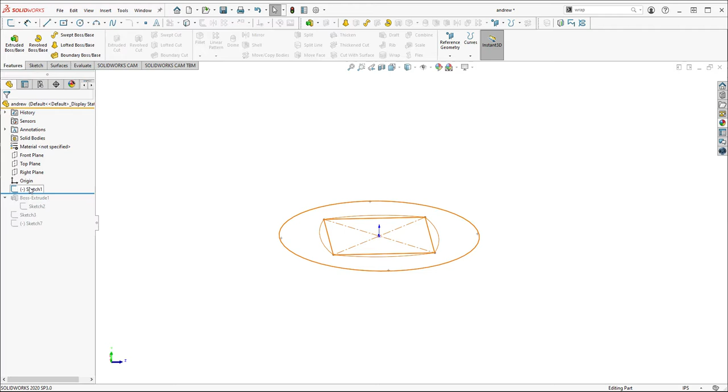I think one of the things to consider in SOLIDWORKS is the orientation. Here I think it makes sense to build it with the round face on the top plane and orient it into this standing position at the end for the rendering. It'll just help keep the planes in line. I also recommend having your image open and off to the side.

None of the dimensions that I have are accurate, I'm just judging by eye. Obviously, for you, I hope that you can either judge by eye or try and find orthographics of the image to help you with the traces.

So here's that quarter sketch that I made. Just a comment on the master: these are all mirrored about these lines. So this mirrors about this to give us this one, and so on and so forth. This means that as we adjust one of them, they all adjust equally.

So I copied over two of them, made a sketch fillet through what corner and extruded that up. And then this is a copy of the circle. And actually I'm realizing now it really should be more of, it should just be a quarter.

Again, thinking back to that knob sketch demo, or that knob demo from Project 2, now here's the profile that I want to loft. Something that I'll do sometimes if I want to copy this to be a quarter is actually I'll put in a revolve feature about here, and I'll just revolve it 90 degrees.

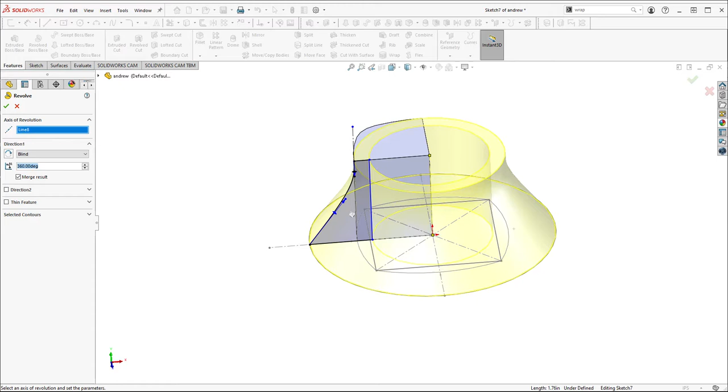I can click this to flip it the other way. I don't want it to merge with anything, but now we have two equal identical faces. If I need to adjust it down the road, it's just one sketch to edit, not two different ones. So this is slightly different from that demo.

And actually I'm realizing this maybe negates the need for this sketch. But what I would do is I would loft, I think this should work, this face to this face. For guide curves I'm going to select this.

And then again a reminder, if you need to select disjointed edges, you want to right click first and say Selection Manager. All of these should be in a row. Make sure you're not accidentally clicking on a different edge when you start it.

And now let's see if this works. Can I say not tangency to face, normal to profile is what we want. And that's again so that when we mirror it we don't have any seams. Seam looks like it's working to me so far.

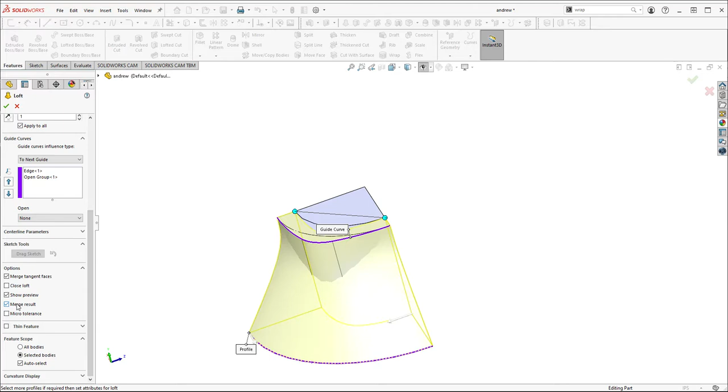We want to make sure that we don't merge anything here. And this was totally unintentional, but I'm realizing now that actually this hollow makes sense. If we look at the image again, that hollow is needed in there.

And then finally we would just mirror the bodies, merge the solids, and mirror this again. And now we should have something similar, of course, missing the details.

The kind of wafer on this back side can be approached in multiple ways, but again, because we built it this way, from this plane, it's probably the simplest thing to do.

And so I'm just glancing over at the image. I would maybe take a spline and then just pull on sort of these arc controls. This is maybe where it's helpful.

The only hard thing with building it at a weird orientation, or an orientation different than the render, is figuring out where your ground plane is. So it might be helpful at this point to have this in here.

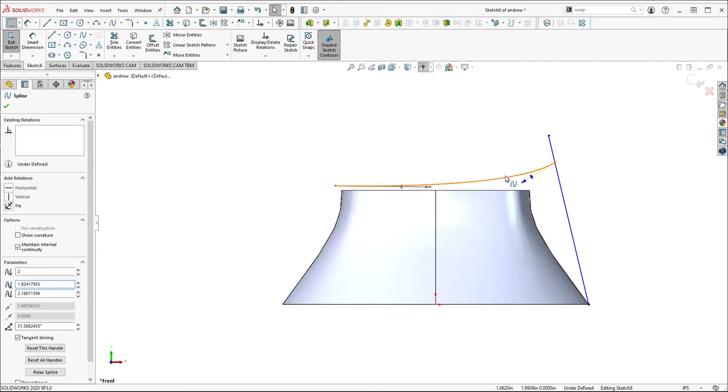If this, I'm having second thoughts on the spline, maybe it's just a straight line that can be parallel with a bit of a bend at the bottom, tangent to this. This can represent the ground plane.

And then what I would do is just with a single line we can load an extrude command. You'll notice down here there's an automatic checkbox for a thin feature. Yeah, maybe this should be done before you mirror this other half. But the direction can be blind, and we can not merge it.

And then creating a sketch on, in this orientation, the top plane. You know, these edges can be copied. So I can select those edges, convert entities.

And let's see, maybe the main difference is this one, it needs to come lower. So maybe I would, let's see, I'd probably put a trim in here maybe.

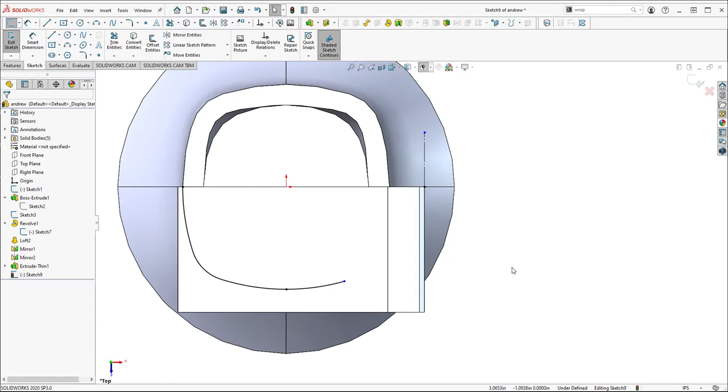And this is perhaps where it would make sense to have, set this for construction. It might make sense to have a spline in here to complete this shape. So we can tell this to be tangent, and we can tell this to be tangent.

Now I'm realizing that this thin command, here, let's finish this and see what it looks like.

Oops, we got to go through both if you're cutting with just a single line. The weird thing with this is it's going to leave this edge. So one way around that, instead of this being an extrude thin, I'm going to delete this—unfortunately it gets rid of our sketch—and instead do this as a surface.

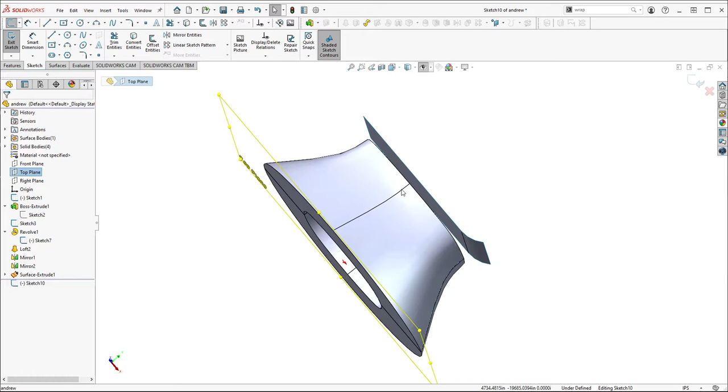So we can extrude this surface the same way we did the thing before. Top plane, same exact process, copying this edge over.

Maybe we only want the top one, and maybe here again is where I would have a line coming off this bottom edge, complete this with a spline, tangent, and tangent.

There we go. And now we're going to do a surface trim. These are all new tools. I loaded that while still in the sketch, so it's using the sketch as a trim. Here you can see I can select parts of the surface to cut away—remove selections. Sometimes it might default to keep selections, so just make sure you know what setting you have, and check that box.

Now if we take this surface and use a command called thicken, this edge running along the side will be consistent—we won't have a weird cut in it. Again, this is all just judging by eye. You can flip the direction it goes. We don't want to merge the result. But now we have a cleaner edge.

So maybe that's the way I would recommend doing this. Obviously we'd want to cut away at this in here.

This is relatively straightforward, but it would be done with a series of sweeps through the middle here, or sweep cuts perhaps. So again, having this open off to the right, here we can see my master recommended setup. Again, this is just judging by eye, so don't take any of these measurements to heart.

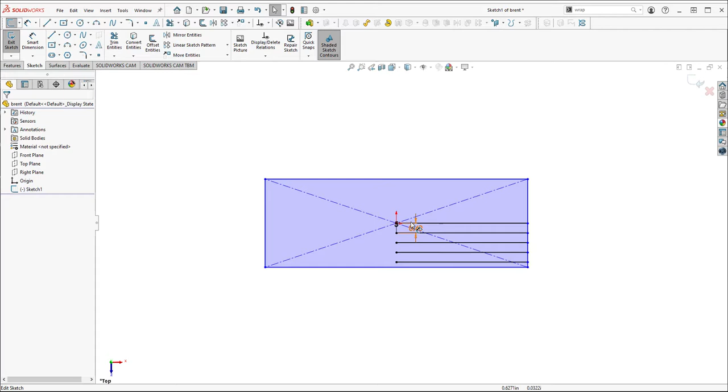Now, I did count the number of cuts in here—I believe it was 8, or maybe 7 ridges in the middle. This is what I'm referring to: 1, 2, 3, 4, 5, 6, 7 of these peaks, not counting the outer ones. So that means 1, 2, 3, 4, 5, 6, 7, 8 of these valleys.

So I think these represent the peaks. Here's 1, 2, 3, 4, and then if we mirror these 3 over.

So that means—I'm trying to think—now that I think about it, the cut would make more sense to sweep than the peak. Actually, I remember now, it doesn't need to be a sweep. This can be an extrude cut straight all the way until it starts to radius here, and then this can be a revolve. So I'm just going to run with what I have, and just remember that the markers I have are the peaks, not the valleys.

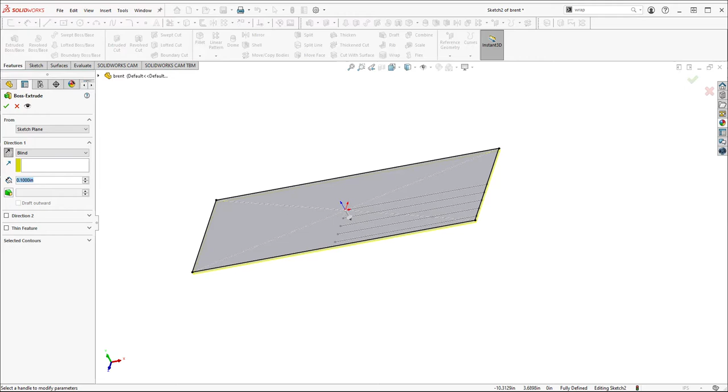So firstly, I'm going to create a new sketch on the top plane, select this outside edge or rectangle, convert entities, extrude. I'm just going to extrude this down, looking off to the side at the picture.

So again, these are the peaks, not the valleys. So I'm going to create a sketch on this face—I can do that because it's flat. I select it and then Alt plus S, Alt plus N to make it normal to me.

So here's what I was saying, where these are the peaks. I am going to make sure that that's coincident and this is coincident. So carefully select this endpoint and then this endpoint.

I'm going to try and set this up so that it's symmetric. So set that to be vertical. I just want these guidelines to be for construction.

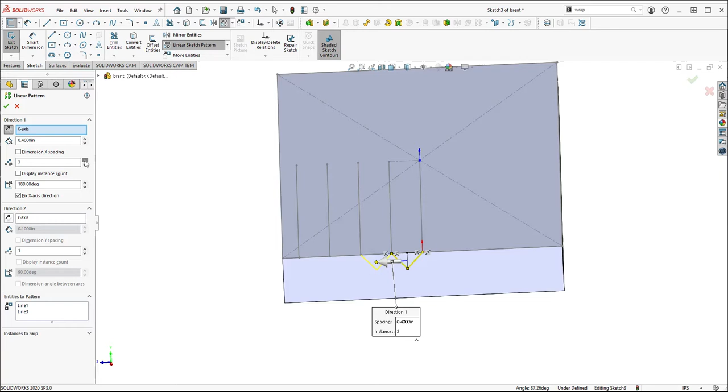So I'm matching that number that was here, and I'm just going to pattern this like so. Now, we can treat this in a number of ways.

This could also be—really this probably should have been extruded in half. This first, let's call it a chocolate bar. This could be like another master sketch in here, but I'm just going to close off this shape.

Extrude cut—in this case, I'm going to say up to vertex and go up to here. Don't know why it's not displaying for us.

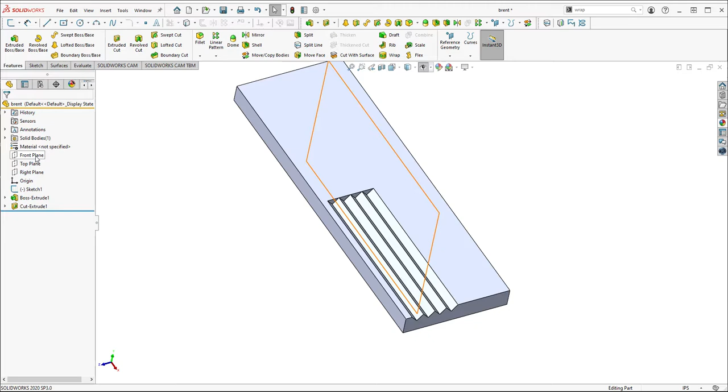So here's what I was saying before. Now we have this cut. Like I said, this chocolate bar probably should have been half, so this is sort of my quick workaround now. I'm just going to select this front plane and cut with surface, make sure the arrow is pointing away. Again, this is kind of like the quick fix, the dirty fix.

Now this does happen to be on the right plane here, just how I have this set up, but we can actually select any of these faces. And really, best practice here would be to select the right plane and create a sketch on it.

I'm proposing that this curved cut happen in the middle here. And then I'm going to copy over this sketch that we used to make these ridges, so I'll select it and say convert entities.

And now in features, I'm going to do a revolved cut, and I want a revolve cut around this center point. Now obviously we don't want it to go all the way around, we only really want it to go 90 degrees actually. And if it's going the wrong way, you just click this to flip it.

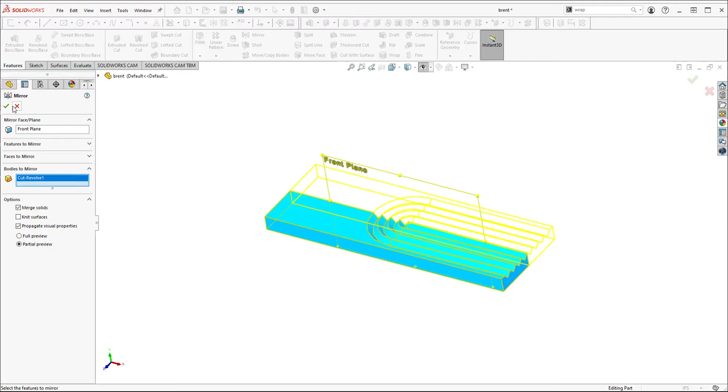Now if we take the front plane and mirror, we can mirror that body. And we have something close to what's necessary. The rest should be relatively straightforward.

If for some reason your valley doesn't end up directly in the middle on a plane, this is what I was kind of hesitating on before. This sketch can always be created on one of these triangular faces in here.

So instead of the right plane, because proportionally, I don't know if this is exactly in the middle, right, this may need to be shorter. You can always select one of these faces if you want, but best practice, if you are on a plane, it'd be good to use that.

If you need to adjust this, there's also a new command, but sort of a quick workaround, it's this move face command. You can select this here and just put in a value, flip the direction, right? So if you need to adjust this proportionally, you can do that.

So this one's relatively straightforward. There's going to be a lot of extruding and extrude cutting and repeating on that level. If you can find an orthographic, this would be incredibly helpful because there's a lot of details in here that need to be addressed.

But I think what I'm going to show is just roughly how I would construct this window. For the master, again, this is just judging by eye, but if you have an orthographic to reference, that would be helpful for the front view and then this side view. This is just mocking in the buttons.

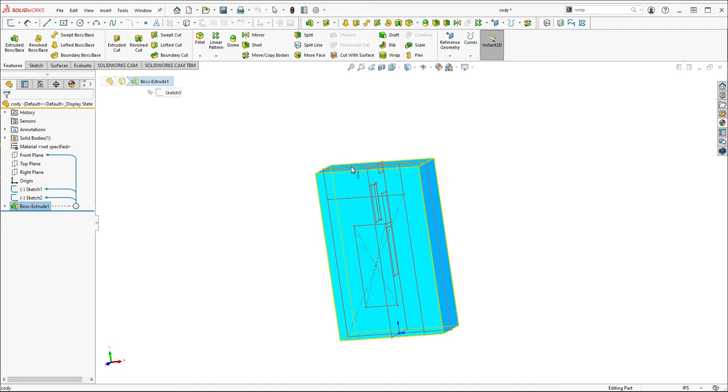What I did is I copied this outside rectangle, extruded that. I'm going to create a new sketch on the front plane, so select the front plane and Alt-S, Alt-N. Alt-S to create the sketch, Alt-N to rotate it so it's normal to us.

And I'm going to try and copy both of these, and I'm going to try a new command. I think it's come up before but hasn't been expressly talked about, it's called split. I don't know, it may not like this 90-degree angle in here, but I'm going to try it.

So I load this split command, and then I just click on the two different bodies I want. I really want all three, but this one will be created by just selecting these two. And I can check this box, and now here you can see we have three bodies.

The split command is a weird one in that it does not consume the sketch. I don't know why that is, to be honest.

Now we want there to be a window on this front face. So one thing I would do is right-click on this body and select Isolate, which hides the other two. It's a quick way to do that.

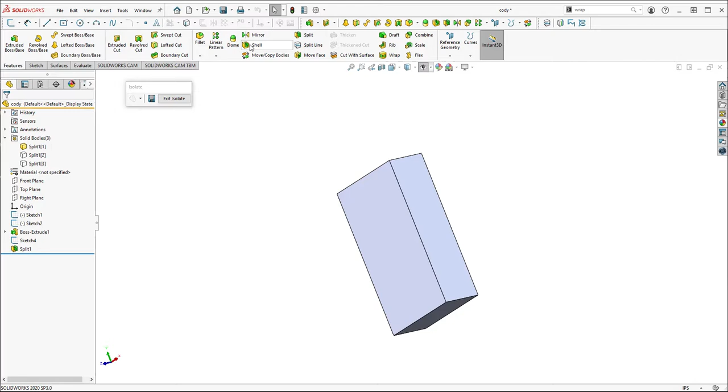I would just shell one of these faces that's going to be hidden. The shell command makes it hollow to an existing thickness. Now that's done, I can exit Isolate, and it looks complete again, but this body is hollow.

What we can do is on this front plane, create a new sketch. So Alt-S, Alt-N for normal to. Alt-V turns on the sketches. I'm going to select the window that I pre-set up.

Convert entities. Now there's different things we could do here. We could extrude cut and then extrude to recreate the window, or we can use the split command I just showed you again.

The split command, I think it loaded with the sketch here. You want to click in this box. I didn't think I had to do that last time. Now I can click on this face, and you'll see with this box checked, it'll split it out. So now I can check this box.

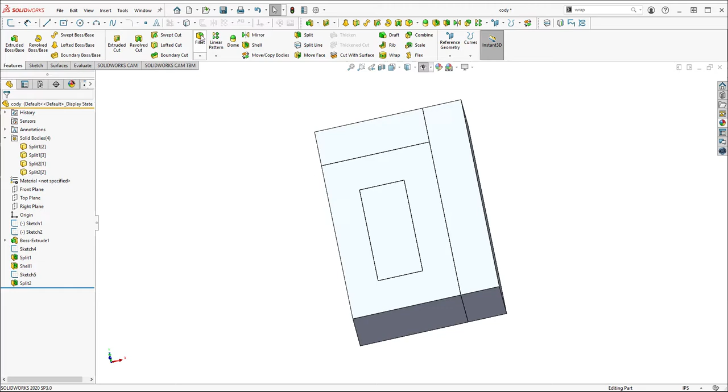Now it's just a matter of putting fillets on here, like 0.04. Again, when in doubt, a millimeter seems about right. It might have made sense, before we do this split, to put some small fillets in the corner.

So I can always come back and edit this sketch, I believe. Maybe like 0.02, a really small corner fillet. Maybe that's too small.

So I can select all of these. Let's change this to 0.04, and check this. There we go. Now there's a small fillet in here.

Now when we render this, if we change this to change the transparency, it's like a window we can see in. Of course, the parts that engage with the tape would have to be built.

They could be revolved. Creating a new plane and revolving would be the way that I would do that. But a lot of these buttons would be like an extrude cut to make a pocket. Maybe I'll just show one of them.

So now on this face here, this is my mock button setup. Because this is a flat face, I can sketch on it. I'm going to select the face and Alt-S, Alt-N.

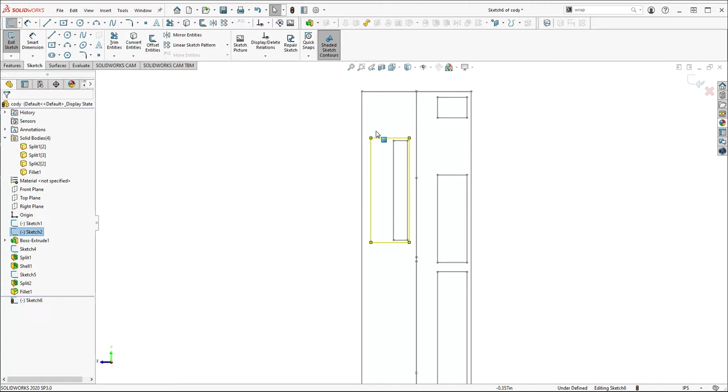I can right-click on this, say select chain, convert entities. Now I'm going to say extrude cut. Again, the amounts and values are up to you to judge by eye. I'm just doing this more for demonstration.

Now I can select this back face here, Alt-S, Alt-N, and then Alt-V to turn on the sketches again. Select chain, convert entities, and now extrude.

This is where we want to make sure, firstly, that the button goes above the surface. And now we don't want to merge result with this button. Now it kind of exists in this pocket, similar to our setup.

So it's going to be that process over and over again. Just when you do this, make sure you have a bit of a gap here so that the shadow is cast. This surface with the horizontal lines extends beyond what we can see, and there's a bit of space there.

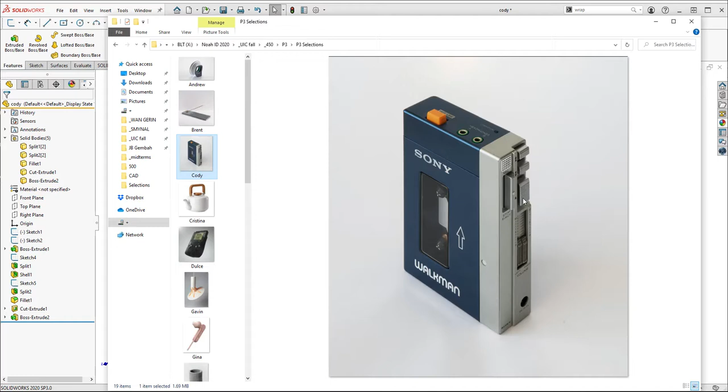I believe that's how these sliders work. They probably have a piece of plastic that goes off to the side. These can all be extruded for the most part. Texture can be done in Keyshot or in SolidWorks.

The complex aspect of this product is the spout, and this will have to get into surfacing because of its organic nature.

So again, if you have an orthographic, it helps to set it as a background image to trace. This is just judging by eye. A couple things about this.

Where the spout ends, I would connect this with a straight line and create this line to be perpendicular, because we want a plane on here, just to give us a curve or an arc to our spout.

Then this line here represents—it looks to me like the tea kettle has just a bit of an arc to the body.

So here's what I mean. Well, firstly, I created a plane on here. Actually what I did is I connected this point and this point with a half circle sketch. I can show that in a minute.

Then same thing here, I connected this, I created a new plane here. The way to create a plane is insert, reference geometry, plane. When the dialog pops up, I select this line and this point. That's my preferred method of creating a plane.

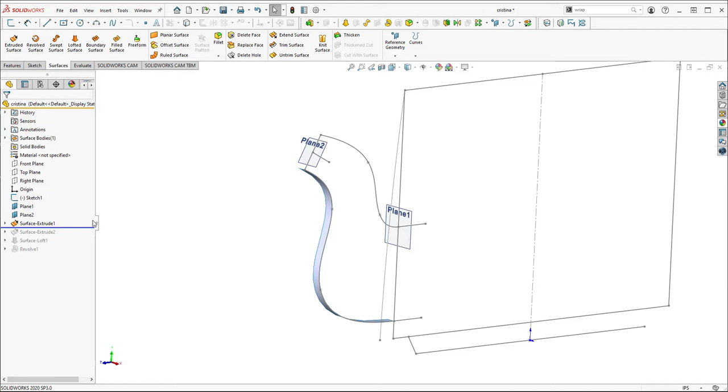Now, getting into surfacing, what I did here is I created a new sketch on the right plane, and I copied this spline. Then I went to the surface tab and extruded the surface. A surface is similar to a solid body, except it's just a thin sheet, like a piece of paper. If a solid body is a piece of clay, the surface is just one of those faces. Now the reason I created this extrusion is so that we have something tangent.

So that when we mirror this - again, we're building it in halves - the spout shouldn't have a seam, it should be nice and smooth. So I did that for the top and the bottom.

So I'm actually going to delete this loft here, firstly to show you that I created these circles, half circles rather. When I created this plane on this face, it's a half circle connecting this point and this point, and then the same thing here. The center of the circle is on the center of this line, and the center of this circle is on this line - you can see it right there.

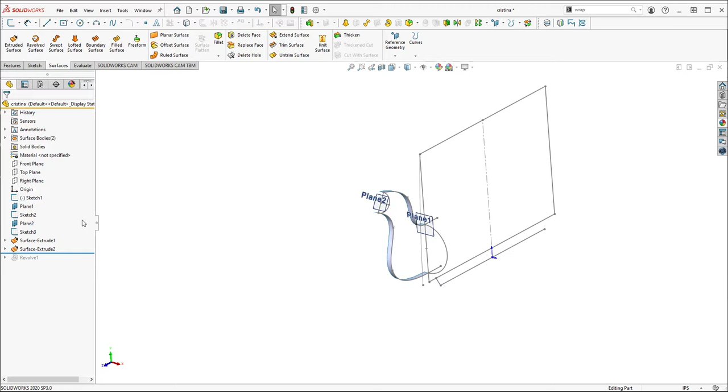So what I did is, again, in the surface tab, I loaded loft. The loft works very similar to a solid body. I just hit Alt and V to turn off all the sketches, so the profiles I'm selecting these two edges.

And then now for the guide curves, I'm going to turn the sketches back on, and this is where I want these circles.

Now surfacing allows for more controlled modeling because you're modeling one face at a time, as opposed to four faces or three faces of a solid object or a closed shape, so to speak. So in this case, we're just working line to line, and this is where it's useful for doing more organic options.

Now here again, like I mentioned, the start and end constraints, we want it to be tangency to face - that's why we created this surface - and tangency to face. It could be done with just the sketch and normal to profile. I found that this method leads to slightly better results, it's a bit more controlled, albeit it's like two extra steps here.

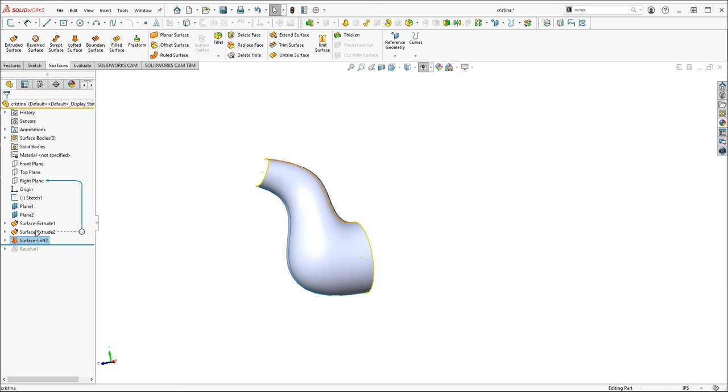Now the thing with surfacing is it has to go from a surface to a solid body. So firstly, what I'm going to do is, since these were just for construction, I'm going to right click on them and hide them - we don't need these surfaces anymore. I think the rest of the teapot is understandable, right? This kind of revolve of half of it.

But what we need to do is close off this surface. So what we're going to do is, in this right plane, we're going to go back to the regular features and say mirror, and here's where we want to mirror bodies. I don't like that they call them bodies here because you can also mirror surfaces in that selection - I guess in this case it counts a surface as a body.

Now there's a couple things we can do to turn this into a solid, and actually because this is an open spout, perhaps the best thing to do would be to thicken this.

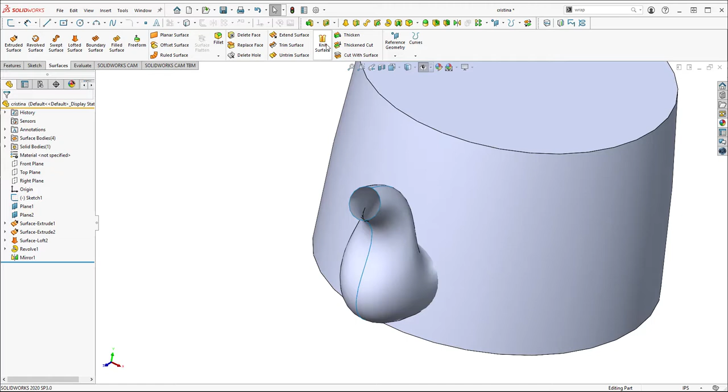So what we're going to do is go back to the surface command. There's a command called knit, which is basically combining surfaces together. So we load that and select the two surfaces we want to combine, in this case left and right. Check the box, so now this is one surface. If I drag the blue bar before that, you'll notice this blue line in between them - the blue line indicates a surface edge.

When I drag this down, the blue line in the center turns to black - it's now connected. And so now what we're going to try and do is a thicken tool and see if this works. So I'm going to load, again I'm still in the surfaces tab, I'm going to click on thicken, click on this, and here you can already see the offset of where it would be.

This can be kind of a finicky tool, it doesn't always work well, Jenga tower wise - it can lead to failure. And we can merge result, that's fine, it's going to merge with this body anyway. And there we go.

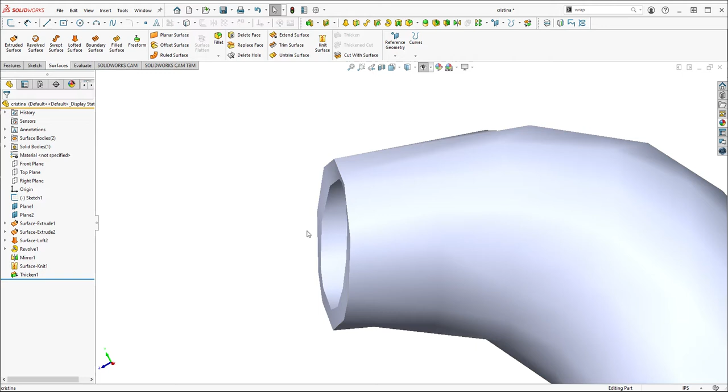Yeah, see, sometimes it leads to - can you see how this edge is behaving kind of odd? That's because of the thicken command. Now the way you solve that is you can make this spout longer than it needs to be, and then in this right plane, throw a cut on here.

So I'm just cutting with a thin line through both. If the thin line is confusing, you can make it a closed shape. And now we have a cleaner edge on that spout.

So we're going to create a body that represents the path. I think maybe it's more clear to just show it in SolidWorks. So again, an orthographic view of the object would help.

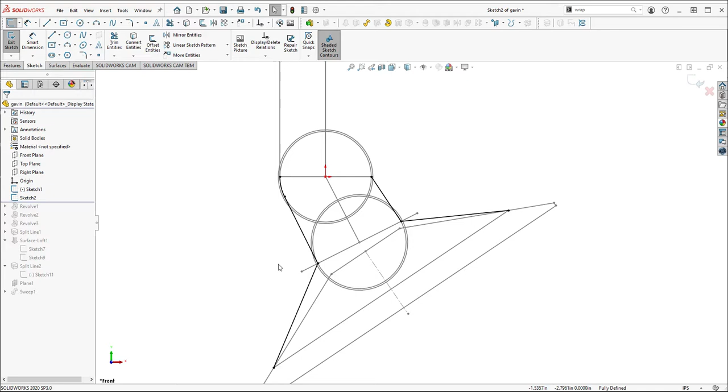What I mean by that is it represents where these circles will end up from a side view, these holes. And I'm connecting those dots with straight lines. The only one that's not straight is this one, because the rope would bend along this sphere. So that's like a secondary master sketch to help set that up.

Now this first part I think is pretty straightforward. We revolve the basic geometries. This split line, again, this represents where the hole will be. So to create this command, it's like a new sketch.

So Alt-S, Alt-N, selecting this line, convert entities. So now we have this line. And then in the surface tool, we want to go to curves, split line, and select this face. And what that does is it puts this black line on here.

We're going to need this edge for our surface loft. So that's how I created this. So now here's the surface loft, and let's look at it.

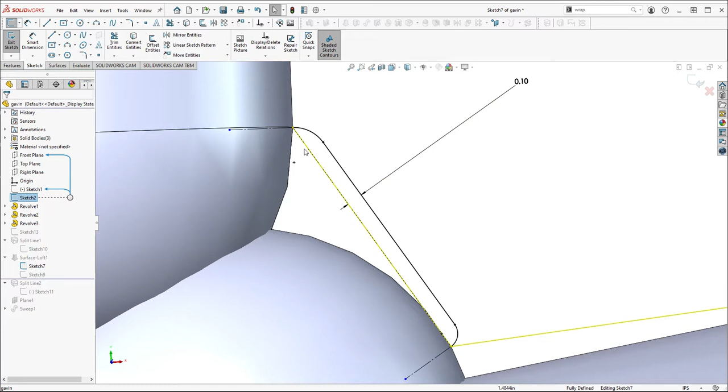So this sketch here, this is off of this master. Here's this line. This is simply an offset of 0.1 from this line to here. This is a line that's along this edge. This one is also along that split edge, or it's really also along, if I turn this master back on.

And normal to, oh, okay, it's not along that. Oh, this is perpendicular to this. I would argue actually, so I have this wrong. This should be along this line, collinear. Not that it matters, that's splitting hairs.

But anyway, this offset is then connected by these tangent arcs. These are just tangent to here, a simple arc, no spline or anything.

This sketch is created the exact same way. So here it's, again, using this master, copying these two sketches and then an offset of 0.1. These lines are in phase with where the circles will be, and then a slight arc between those.

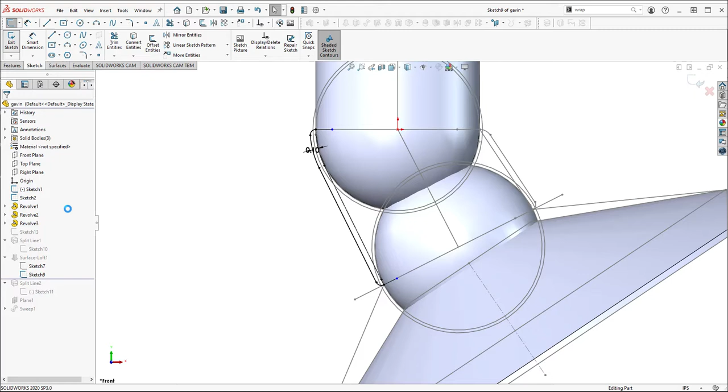Now, what we're doing is we're lofting as a surface. So a surface loft is—a surface is just basically a flat sheet of paper as opposed to a three-dimensional shape or object—and we're lofting a line to a line.

So here in this case we have this line to this, or that's the two sketches I just showed you being lofted to each other, lofted here. The settings are very similar, if not identical, to the solid body loft. It's just, again, lines as opposed to shapes.

And that creates our surface loft, which I can turn on here. So what this does, this is going to represent sort of like a three-dimensional plane that the strings will follow.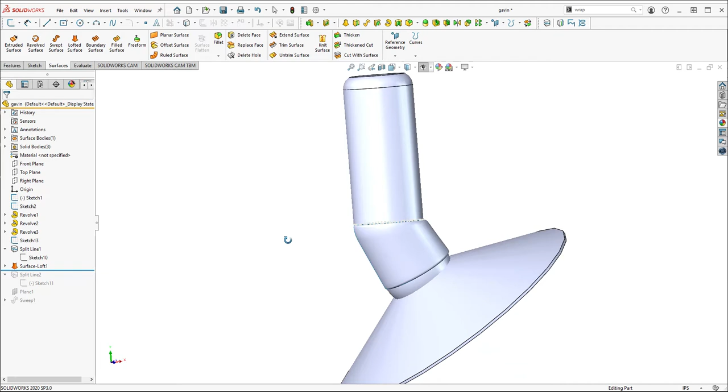So the next command we're going to use the split command again. And here, let me just show you this sketch before we put it in there. This will represent where the strings are. And so this is where you're going to have to do some studying of the object and figure out how to set these up in the best orientation or where it makes sense.

Here I'm just representing it with a V. And once we have that, we're going to use the split command. If you ever get an error on the split command, just simplify your sketch. You can always do it one at a time, and we can always add more here.

The kind of confusing thing is this sketch, because it's coming from the side, is doing something kind of weird. So you may have to do another sketch from this vantage point. I definitely recommend you do this in halves, so you don't have to do this twice.

But you may need to create a series of planes to get this split to happen properly. Again, I don't know if I'm explaining it in good enough words, but this line here has this J hook to it. Because it's just the nature of geometry, since we're cutting from this view, you may need to cut from this view or even maybe this view.

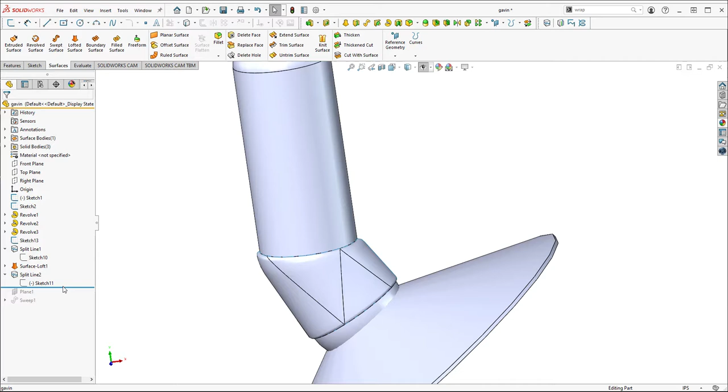Now, once we have this set, I recommend using this tool, right click and isolate. You can look just at the surface here. Now, I created a new plane, and the way I did that is I went to Insert, Reference Geometry, Plane. I selected one of these edges here.

This is whatever you want to sweep along. So I select that edge, then select an endpoint, a starting point here, and check that box. You may have to do that for each of these strings going all the way around. But I'm going to delete that out because I already have that in here as plane 1.

Now what I did is on this plane I sketched a circle on this point, as shown here. And then after I sketched that circle, I created a sweep. Here's the circle, the train, and the track is this edge.

And now I can exit isolate. I can right click on this and hide it, and we can see what that starts to look like. It's basically repeating that step process a couple times over again.

You're going to have to do another surface loft for this portion. It may be also helpful, just like we split line to get these guidance, I'm going to create a new front plane sketch. You're probably going to want to split line this one too.

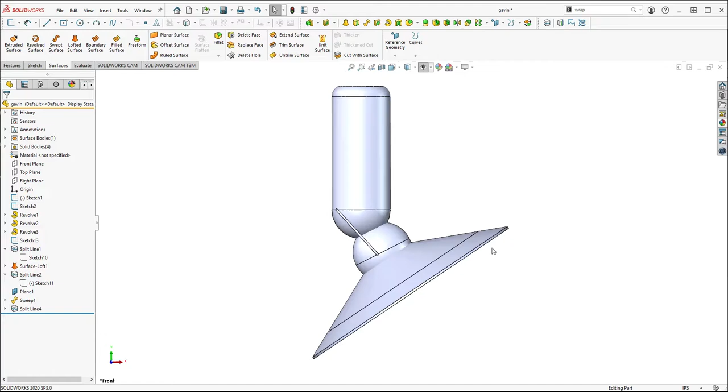On here. And then same thing, you're going to want to loft, again, an edge with a slight curve, the corner's curved on it, to go from this portion to this portion. The reason the curves are there is to represent this sort of turn into this hole.

Now to make this real, you can see this ends, I believe if you select this face and go to Features and say Move Face, you can push this deeper into the body as needed to make it look more realistic.

Again, here's what I'm talking about with this angle looking like it may be slightly off. It may work, but each of these splits into the surface may need to be perpendicular to the curvature.

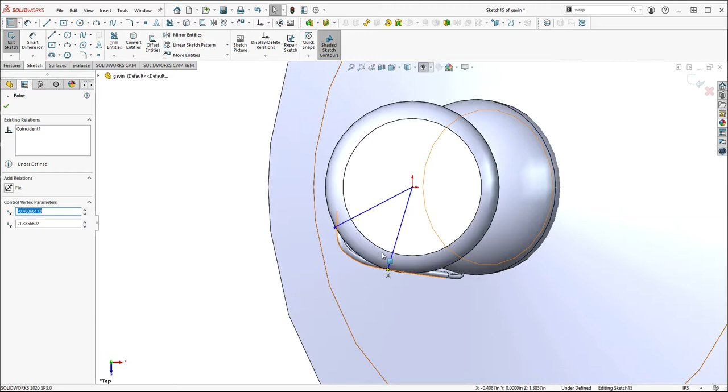So let's see if I can explain that from a top view. You may need to create planes like this. So there's a plane on this face for that edge, a plane perpendicular to this point on this edge, so that each of these edges, as they split the surface, are happening sort of perpendicular to its curvature.

The most complex thing about this piece is definitely the texture and the earpiece. This can be done with a revolve. These textures look pretty straightforward, this might be able to be done in Keyshot. But it could also be like extrude, a pattern cut around. I'll show a way to do this.

You can also think back to the grip demo on the bottle, the advanced demo. This would be a sweep. The circle would be like a circle with all these little divots cut into it. But let me show this earpiece and this fading texture, how that might be done. And I'm realizing this piece looks transparent, so we can talk about that.

So the master sketch here, it's just simply the earpiece—the outer piece, the center, and then this kind of off-center oval that goes in the ear. So I'm just extruding these. Really best practice here would be to do it in halves, but for this project I can understand doing it in a whole like this. So the first loft is basically this circle to this face.

If we look at the settings, it's normal to and tangency to face. So here the tangency to face is this. I think this could also be normal to profile.

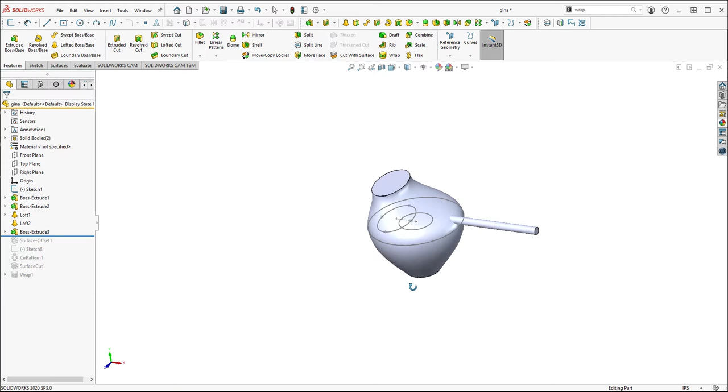All right, now the texture. There's a couple ways to do that, but I think this is the best way I've determined: we want to extrude this. Now we're going to get into some surfacing here. In surfaces, there's the surface command, we can do something called an offset surface. What that does is we select a face and you can see it kind of pushes it out. And here we can set in the depth of the texture.

Again, you don't need to use my numbers. I'm judging by eye, doing this kind of rough and quick. But basically you can judge for yourself where you think this texture needs to be, the depth it needs to be cut to.

So here's my offset surface. Then what I did is I just patterned this extrusion all the way around. And then we're going to do another command, a new command called cut with surface.

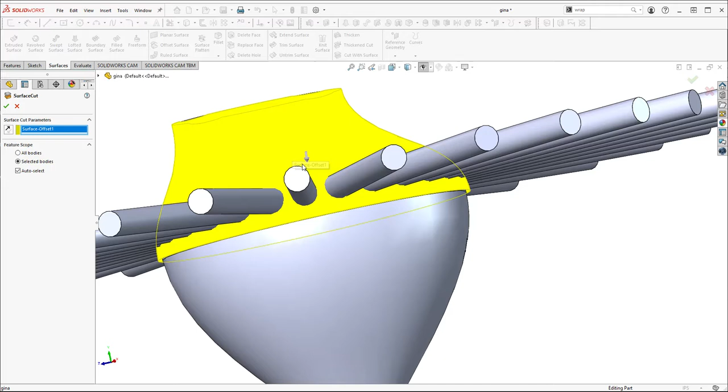I think that's it. I'm realizing this says surface cut, but we're going to load this. And we're going to select this offset that we made. We want to make sure the arrow is pointing outwards, so I'm going to click on this to flip it out.

Here for the feature scope, I think we could leave it at auto select. That should work, let's just try that. It makes our life easier.

And now if we hide this surface, you can see that these bumps are all set to the right amount. Now I would repeat this to match the image. It looks like the surface texture gets more shallow to me, so you might need to do another extrude. If you need to create a new one, let's see, this was just on the front plane.

Now, so this command did the same thing. Now there is another command called wrap. It's a little bit more fussy, it doesn't always work, but I can show it here.

So here we have the bumps on this face. Let's just load it again. Here's a sketch on the front plane of 3 circles. I'm going to load the wrap command. So here: bump out, bump in, or split line, circle or wavy face. For some reason the cylindrical option didn't work, so the wavy face is selected.

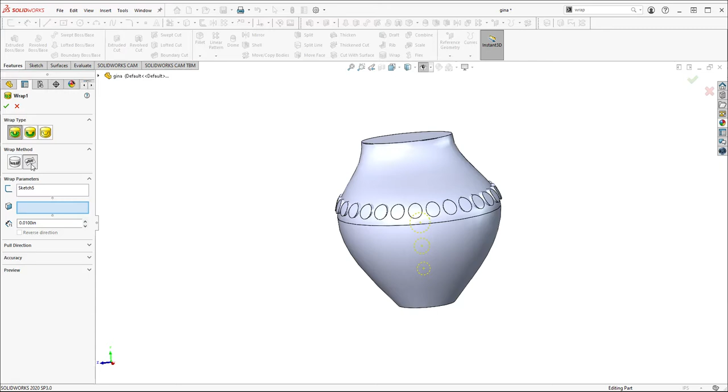And here it's asking what face to bump out on, so I'm selecting this. We can see that it's loading here. And again, right now it's a bump out of 0.01. If I check this box, that's what it gives us.

Now wrap is more so used sometimes when there's like a logo or something, especially to put something on this kind of organic face. So if I select this and I pattern it...

And maybe the spacing is too far, so let's go 0.04, not far enough, 0.06, and check this box. When I exit here, you can see that it'll wrap this pattern, but what's happening is it's getting wrapped up kind of like a rainbow here.

And that's because you need to think of this like a sticker. If this sticker were placed on this face, it would curve up and away from us, and that's why that's happening. I believe it would work better if this option worked, but for some reason it's giving an error. I'll be honest, I don't know why it's doing that. So you can try playing with that command.

Honestly though, I think this offset cut is going to work better for you, the first thing I showed.

So this is a relatively straightforward overall shape as far as being a revolve. The complexity, of course, comes from the texture. And yeah, we can definitely touch on some surfacing on how to accomplish this.

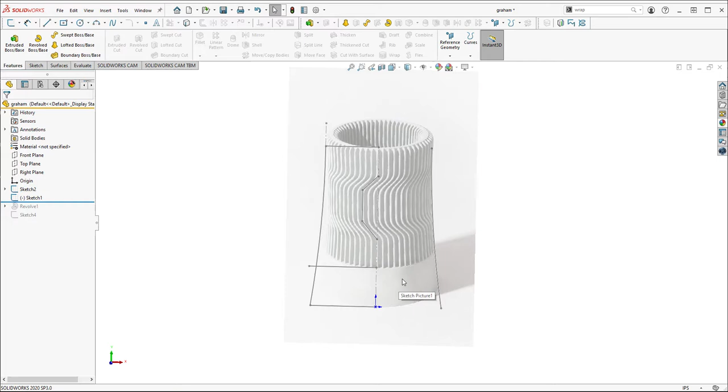Here's the first object I think that I've brought the image in to look at. This works better with cylindrical objects because you can trace the center to get what you want and kind of ignore the edges. Again, thinking back to the bottle sketch, or the bottle project rather.

So I'm going to edit this front sketch. Here you can see this like back edge, just checking that I'm getting it. This left edge, I'm losing it a bit. Yeah, reminder to bring this background picture in its sketch picture, and you can load the selection there.

But yeah, so here we have it traced. This is marking this bottom portion, so I can revolve the base.

Now the next thing I might do is create a new sketch on the front plane. I'm going to copy this feature, and I'm going to copy this center feature. So just hide everything - those are the two sketches I'm working with. I'm going to set the middle one for construction.

Now I'm going to go to the Surfaces tab and revolve surface on this edge. This will be our guide as to how far we want our feature to go. We can hide this for now.

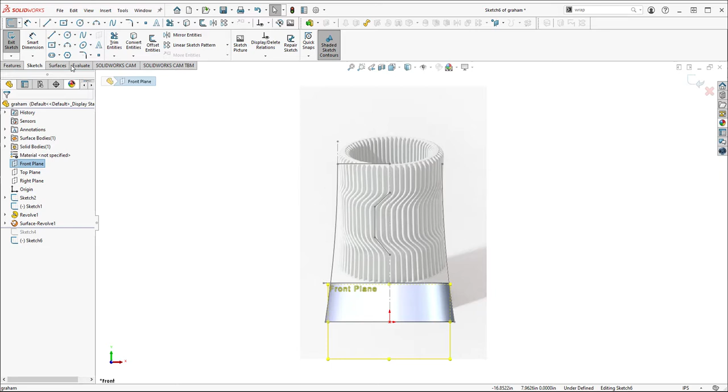So I'm going to do the same thing, Alt-S, Alt-N to create a new sketch on the front plane, Alt-V to turn my sketches visible. And now I'm going to copy this exact same line here. What I want to do is set it to be for construction and offset this to whatever depth we roughly judge this to be. I can kind of look in the sketch here.

I don't know if you can see it in the video, but I can look at where the shadow ends, just visually aligning by eye to what that is. Again, my numbers are not accurate by any means. Oops, didn't mean to exit out of that.

I'm going to create a center line here again, set this to be for construction, and once again revolve a surface around here. So here we have our two surfaces like that.

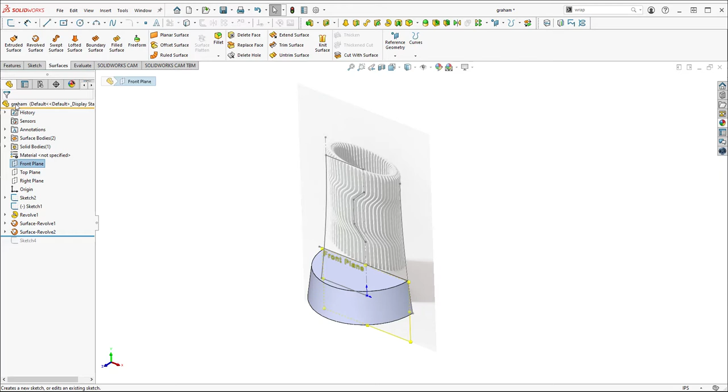Now here we want to create another feature that will be the center. I'm just going to hide both the surfaces for now. I'm going to create a new sketch on the front plane - front plane, Alt-S, Alt-N, and now I'm going to select this part of the sketch, convert entities on that.

L for line, L for line again, and now I just want to hit F for fillet, or this command here. Now, I don't know if these are all equal. I'm assuming they might be.

So I select all those lines, and you can see the little yellow pieces in the middle, and just kind of get this close to match. I'm realizing this up here is a bit off. But yeah, here we have our fillets.

Check that box. Now we can go back to surfaces again and extrude the surface. So we're extruding a paper thin piece, and here we're going to try up to surface. What we want to do is go up to the first surface we revolved, which represents the outside.

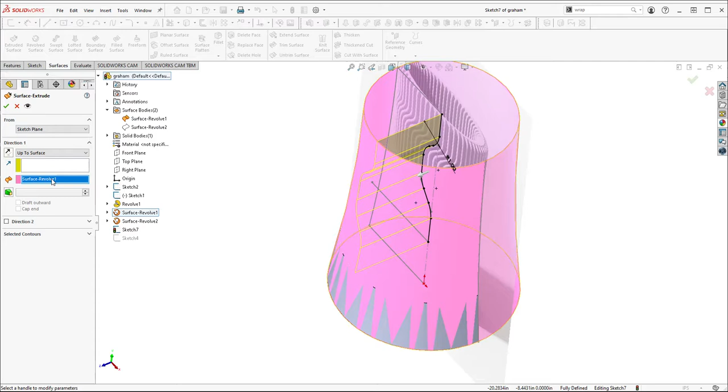Now if it's not letting us select it, I can click on Show Surface Body and I can click on this. I believe I was clicking on the wrong thing, and here I probably had to click the command. Let's try that - yeah, clicking the command works. That way, even if it's not visible, but that's the way to do it.

Now with surfaces, there's no worry about merging. They're never going to merge - you have to manually do that. So now we have this.

Now we're going to use this inner surface here - or sorry, this is the outer one. We can use this to trim, but now I'm actually realizing that we actually want another surface just slightly in, because if I study the image, it looks like the texture also goes inside a bit.

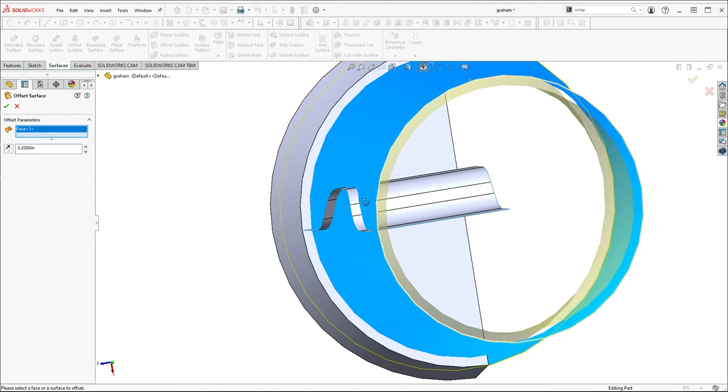So what I'm going to do, we could revolve another surface just like we did these ones, or we can use a command called offset surface, selecting this inner face, and just roughly judging this gap to be equal. Check that box. And now I can do a surface trim, or a trim surface.

We want standard. The trim tool is this inner piece. And then here we want - you want to check whether you're keeping or removing. In this case, it's set to remove. So the part I'm going to select to remove is this inner portion like this here. And I'm going to click on that green check.

Now the remaining thing to do is to turn these surfaces into solid bodies. So you see here I've been building kind of in halves up until this point, or at least this bottom revolve - I guess this could have been a full revolve, just given the nature that we're patterning. So here I'm going to use the thicken command.

So here I might want to select this midpoint and set this to be whatever we judge the distance to be, 0.05. That way we have our distances equal on both sides. And sure, we can merge result with the bottom. I'm going to edit this command to just be 360 in this instance.

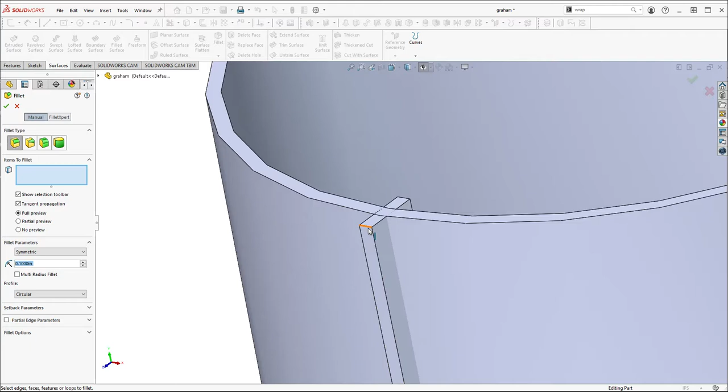So now we have our center ridge, and now we can use the exact same thicken command for this piece. So we're going to go to thicken, select this. This time we don't want to merge result, or I would recommend not merging. And here we want to fillet these edges, because I think in the source image that's what's happening.

And now it's just a matter of patterning. So we can go here to the circular pattern, Alt-V to turn our sketches on. So here it's going to default to the features. We don't want that, we want bodies. We want to select this one. This is why we didn't merge it.

And here for the direction, we want to select the center here. And then it's just a matter of putting in a bunch of these. This will probably slow your computer way down, depending on how many bodies you have in here. And it may be a matter of now just playing with the depths and stuff. But essentially, that's the approach to this guy.

This can be built with extrudes. There's a lot of details here though, with all these fins, and so it's just kind of an exercise in observation. I think I counted 10 of these, 1, 2, 3, 4, 5, 6, 7, 8, 9, 10. Also looking at where this is located - it's located above the 5th one, I believe, and below 3rd from the top.

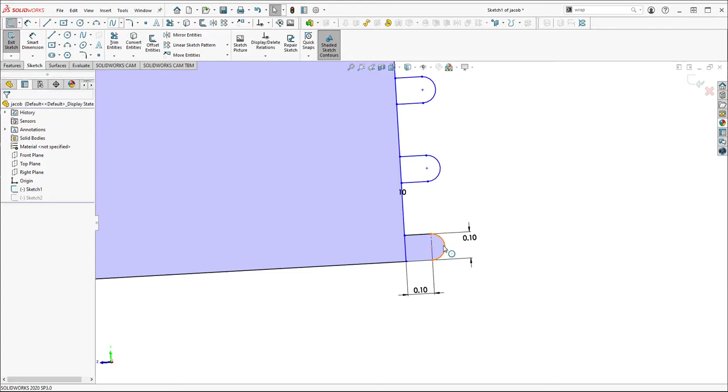So setting up a side view and then maybe a front view in the master sketch. So that's what I have here. Here's the side view. I sketched one of these out and then, selecting them, loaded this linear sketch pattern. We want it to go along vertically, so up the y-axis.

So here's where I set this, I believe, to 10. And then this is just a matter of judging by eye, this distance. If you check the display instance count, I probably should have checked the dimension y spacing. But I think you can always add this in after the fact. So now if I change this to like 0.15, they all move down. And you can change this instance count as needed.

So that's that view. This one here again, like I mentioned, you can see these lines are black, they're defined. That's because I set them to be coincident. I think I said 3rd from the top, so I selected, 1, 2, 3, coincident. And here, same thing, 1, 2, 3, 4, 5, up.

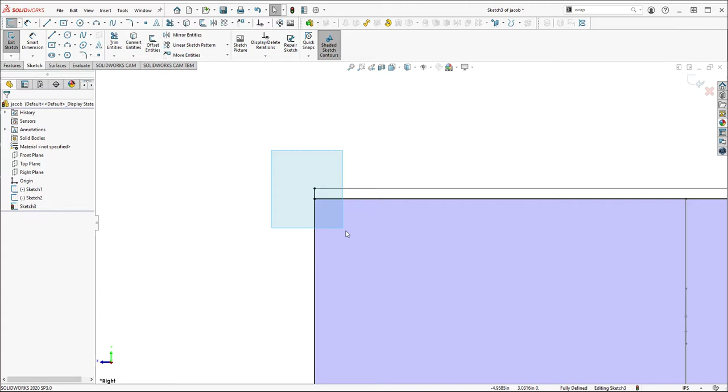And so building it is simply like new sketch on the right plane, master sketch here. I'm going to convert entities on everything. I don't want this top one for now. But I do want to hit the trim tool and trim out all of these, so it's more of a clean, closed shape.

And now we're going to try and do an extrude. And here's where, if you have a side master and a front master, I would do up to vertex and select one of these endpoints. Now, if I observe this, it looks like there's a different texture back here.

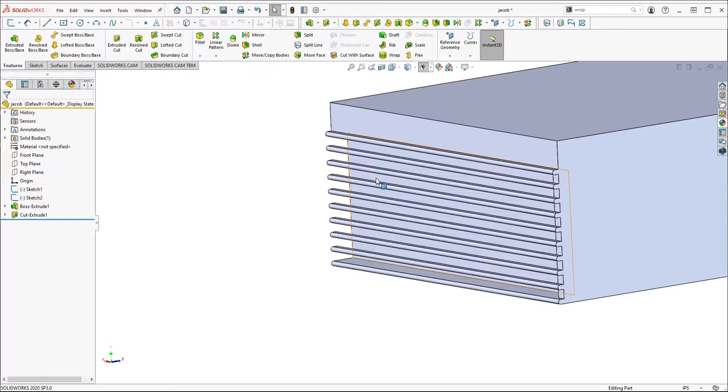So one thing that I would consider doing, whoops, it's not in the master here, but is sketching on this face, on any of these faces here, so Alt-S, Alt-N, and just sketching a rectangle and judging where this texture is going to go, and just doing a simple extrude cut. I don't think the depth matters, but here now we have this kind of pocket behind here.

And I'm going to select this face, create a sketch on it. I'm just simply going to convert entities directly on the shape and extrude it back to where we were. So in this case, it will just load the same dimension that was in here last time, but what I prefer is just say up to surface and select one of these back faces. And now here the key is to not merge result.

So that when we go into KeyShot, you can simply apply a texture to this face. And if I look back to the image, it's kind of hard to see - I don't know, I can't tell if there's a part line back there. But anyway, that's how I'd recommend setting up for this dot texture.

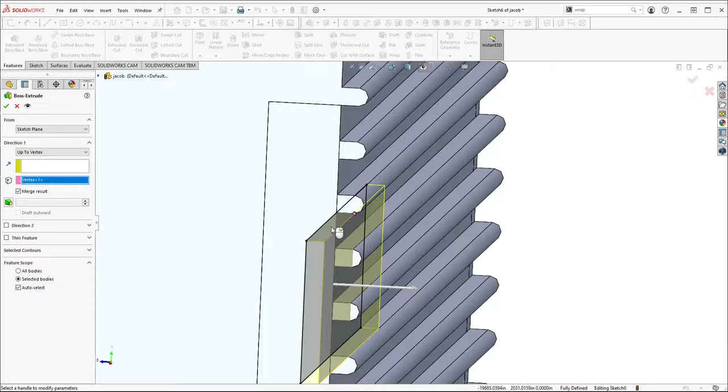And then now on the same face, or create a sketch on this face, I can copy over, select chain, copy over this rectangle. And here we can just simply say extrude. And again, I would say up to endpoint or up to vertex and select like this point here. Actually, no, sorry, I think it needs to go further.

Let's look at this again. Oh yeah, it bumps out further. So in that case, we can just do blind, whatever that is. We don't want to merge result. The top part from a side view, we can select some of these features.

Trim tool on these two. Now really there should probably be a bit of a small gap down here. So let's see, I'm going to delete both of these out. I'm going to set this both to be for construction. I'm going to put a small gap on this, like 0.01, maybe 0.02.

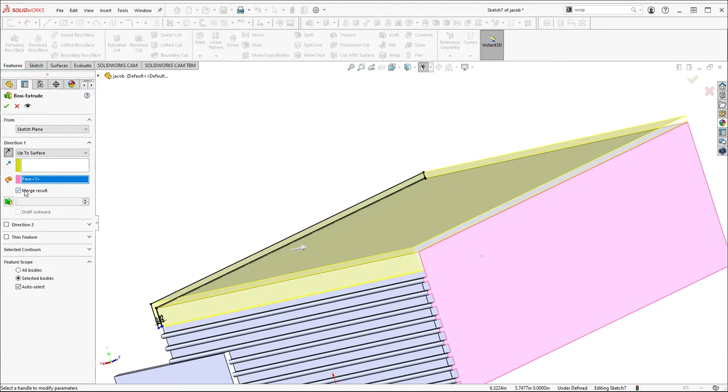And now these are what I'm going to connect. Again, it's all to relate to this slight part line gap here. And then extrude, again, I would say up to surface for me, come up to here, and not merge the result. And there we have most of the details.

I think the last thing I want to show is just this little chord jack here. So I'm going to create a sketch on this face. I think I had it in the master. Oops, I have it on the wrong side apparently. Or maybe I'm building this backwards. No, I just have it on the wrong side. That's okay.

It's okay for the demo. Obviously, for the project, we want to be as accurate as possible. So I'm going to extrude cut on this. Again, sketch on this face. We can do that because it's flat. Here's the circle. I don't think the depth matters that much. I guess we cut through everything, including this.

That's fine, so I'm going to create a sketch on this back face. And what I'm going to do is offset entities, something incredibly small, like 0.01 maybe. And now for the extrude, I want to do a thin feature. Again, these numbers, I don't know what scale, there's no scale I'm necessarily building to here.

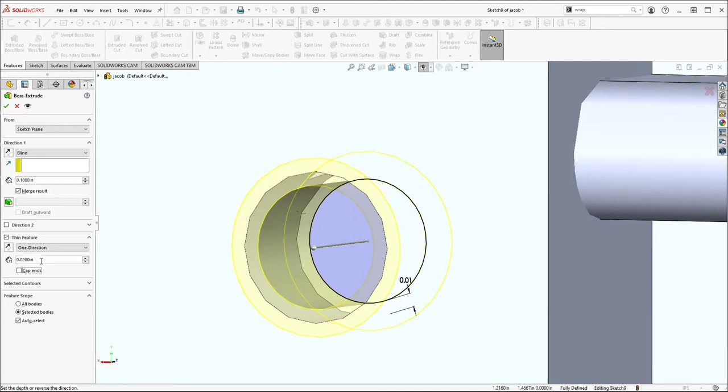But anyway, I think what's key is having this slight gap between this edge and this edge, and then having this extrude just a little bit longer here. And that's how I build that jack. I would also make sure, I forgot to do this, that merge result is unchecked, that way you can give it a different material. And that's just how these jacks look more realistic, having this slight gap between this edge and this inner edge. You can judge for yourself what looks right.

All right, we got a tricky one here. Yeah, there's three major challenges. One is the cut-in of this graphic, the other is the threading, and the third is the grip down here. So, one at a time.

The graphic, I would try and find a 2D view of it, or do your best to lift it from this image. What you want to do is try and trace it, or I guess there's different ways to go about it, but what I would probably do is try and recreate this in Illustrator by tracing it best you can. You can type in these words.

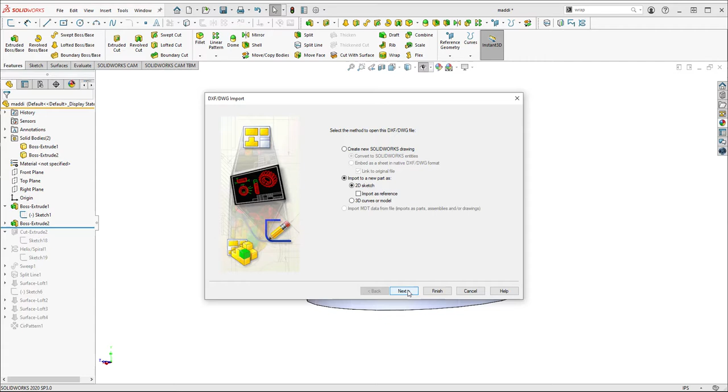Once you're in Illustrator, you can save out or export from Illustrator as a DWG file. So that's what this output looks like. Here we go, DWG file. And in SolidWorks, you can go to File, Open, and select the DWG file and click on Open. When this property dialog pops up, you want to pay attention to these selections. You want to import new part as 2D sketch, and uncheck this box as reference. So just these two. If you click next, there's more settings, but I typically don't fuss with this. I just click on finish.

Yeah, it was asking about exploding blocks. I don't know if it's trying to bring it in as a block, but a block is something new here that might be helpful. So it should bring in this sketch. You can always select everything and Control C. Obviously this is different, this is Paisley, but then here on your front view, or whatever plane you want, you can paste with Control V, paste the sketch. The block is, I would select everything.

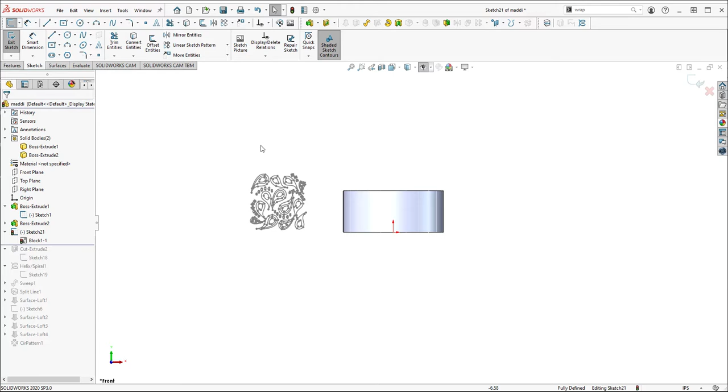This pop-up should happen when you select everything. You want to click on Make Block, and then check this green check here. Now it'll maintain its relationship because now it's a block. You can think of a block like a group. The other nice thing with the block is you can select this and actually set in the value of the size, so 0.5, we'll make it half scale, that way you can get it to be about the size you want. Then probably what I would do to place in the image is use, since I'm still in the sketch, this wrap command.

So we have to exit the sketch. Now selecting the sketch, I'd go to Features and click on Wrap. Because it's a cylinder, this option should work. Here we can put it as cut, select the face we want, set the depth, and check the green check.

There must be an open contour in here, but this should work. Let's try the wobbly face. I'm assuming this isn't perfect, it's probably a bit confused. So just for the sake of trying to make this demonstration work, I'm going to create a new front plane sketch and select only a few of these if I can.

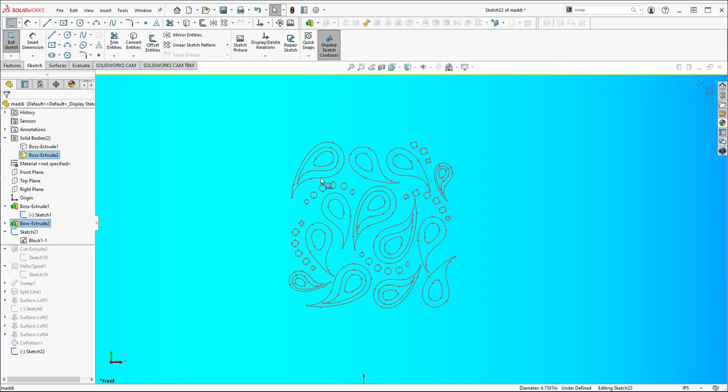Typically you'd select chain as an option here, but it's not giving it to me. So first I'm going to hide the body so I don't accidentally select it. Copy that over. Come on, select chain. Unfortunately it's not an option, so here we'll just grab these two for the sake of time.

Now let's see if the wrap command works with these. If not, there's a chance there's a hole on there. So let's try it again. Wrap this face. There we go.

Now let's select this one. I think you want to select the cylinder since that's what you have. And there we go. It was confused before because there's shapes within shapes, it wasn't sure what's positive and negative. That's why that's happening, and so wrap will be a bit more accurate than a cut.

So that's how I would do that portion, but for now I'm just going to suppress this. The next thing is threading. How do we do that? So here we cut in this hole, looking back to our source image here. It's not all the way deep.

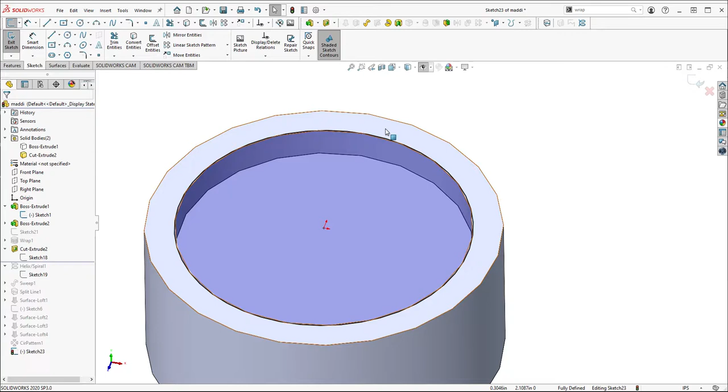Now, the way we create threading in SolidWorks, we're going to create a new sketch on this top face, and I'm just going to copy over this exact sketch I made. So here's a circle. Your thread uses what's called a helix command, and a helix is built from a circle. It takes a circle and turns it into a spring, basically. So here we have our circle sketch.

You want to go to the Surfaces tab and look for curves. If a solid body is like a piece of clay and a surface is like a piece of paper, a curve is like a piece of string. So here the option we want is helix and spiral. I'm selecting the circle sketch, and I select helix and spiral.

Because I've already set this up, the settings are magically correct, but they probably won't be for you. Typically the default is pitch and revolution; in this case, we want height and revolution. So here I can set in the depth of the hole that was cut, in this case 0.4, but match whatever yours is by eye. Then you can set the number of times you want it to go around, to match your best judgment of the image you're copying.

Start angle, definitely set that to 0 degrees. That way it should start on one of the major planes. When you're happy with that, click check. You can reverse direction if it's popping up, pop it down, and change it clockwise or counterclockwise to match whatever it is you want.

So the helix, you can see here I've already created one. It is a curve, we can't see it right now. Oh, because it's being used in the sweep, so maybe it's helpful for me to continue on this path.

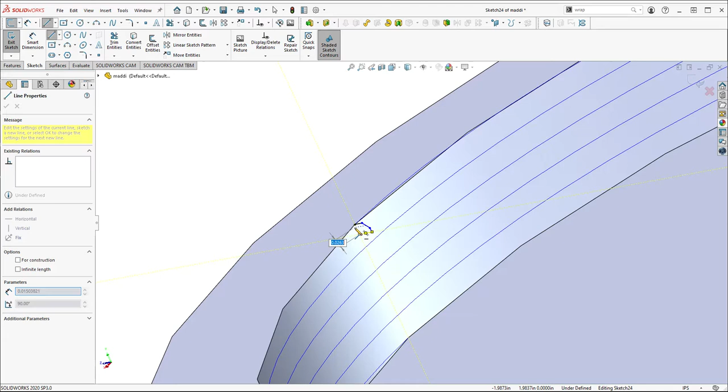Depending on what I do, if I'm just making an illustration, sometimes my threading will just be a circle. But if you want slightly more accurate threading, often it looks something like this. Something like this is often how threads are designed. Sometimes it's inverted or mirrored rather, so it has that on both sides.

But for this kind of render, something like this should probably be accurate enough. So that's our closed shape. We're going to exit out that sketch, and now we simply just go to our feature command and load the sweep. Here it's asking us what our train is. Here's the train. Now it wants the track. It's this. Sweeps it all the way around, and that's what we want.

If for some reason you can't see your curves, you need to go to View, Hide Show, and make sure Curves is pressed in. So there we have our threading.

Okay, the next one is the grips, and that's a little bit more complicated. So I forgot to cover what I have at the start here. I started by creating this sketch, and this is this command here, polygon tool. So let me exit out and just start from scratch. Top plane sketch, select top plane, Alt S, and then click on the polygon tool.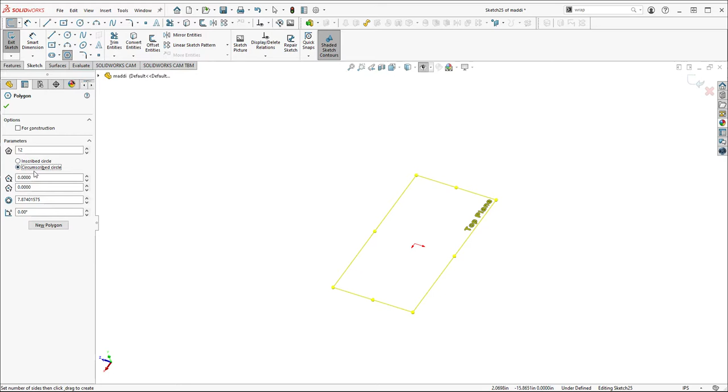Here you can set the number of edges. Looking at this image here, I just roughly counted. It looks like it's a 12-sided shape, but don't take my word on that, judge for yourself. So I simply typed in 12. Here inscribed or circumscribed, this means is the circle inside or outside. I think I did this selection, and now I can click here and drag. And there we go, we have our 12-sided shape.

So I'm just going to suppress that so there's no confusion. Basically that's what I did here, and I extruded it to get us this shape. And the reason why I did circle on the outside is I took this outside circle and then I extruded that, making sure not to merge them.

So the next thing I did is I put a split line, or actually no, sorry, I'm getting ahead of myself. So we want to plan this out, right? Here we're looking, I have this sketch turned to be visible. So we have 1, 2, 3 faces here, right? And each of these faces represents one of these curves.

So we have 1, 2, 3. These 3 in the middle look like they're coming to an arc in the middle, whereas these ones on the outside, it looks like they're going from an arc to the bottom to an arc on the top. So we want to count 1, 2, 3, 4 back, and we go from the 4th one to maybe one closer in. And that's basically what I did here.

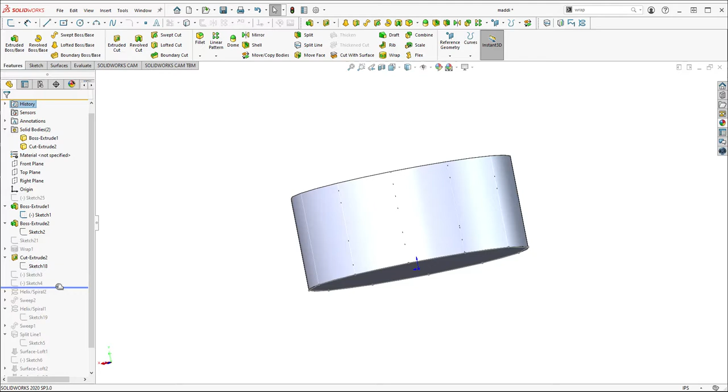If I drag this down, I created 2 sketches here. Let's see, I think I went 1, 2, 3, 4. But basically I created, if I split this out, I apologize, this is probably confusing, but I have an arc from one straight to an arc to another straight, jumping a gap of one face.

Now after I created those arcs, I created this sketch here. And what this sketch did is, if I turn these arcs back on, this sketch is a connection of this point on one arc to this point on the other arc, and then same here as just two straight lines.

And then I loaded the split line command, so this is my sketch. It's these two lines connecting both endpoints of the arc. Then I went to surfaces, curves, and loaded the split line command, and that's what this is. And here it's the sketch, and then for the face, I selected the cylinder. And that was so that I now have two guide curves for my loft.

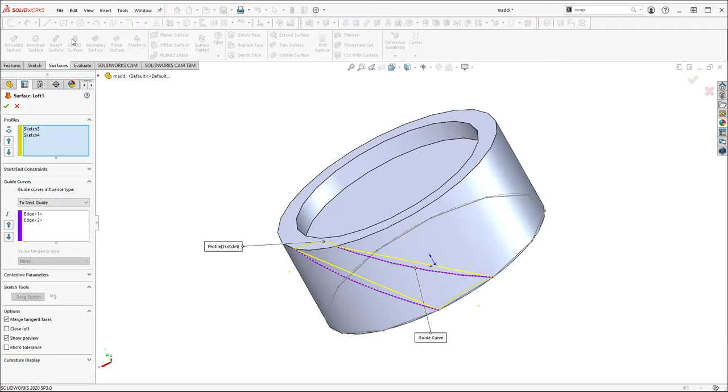So now here's where I loaded a surface loft. A surface loft, the settings are very similar, so again, it's in the surfaces command and loft. The settings are very similar to the solid body loft, except we're lofting single lines to single lines as opposed to closed shapes. So here again, my selections are the two arcs, and then for the guides, I selected both of these curves. No start and end constraints, and just check this box. And this is the result, is a loft that looks like that.

Obviously, we can still play with the arcs. I think, just based on me having worked on this for a bit now, I think I have these far too deep. But again, judge for yourself, you can make your own judgment call there.

Now, one thing I noticed is that this is just a start point, unfortunately, because what happens is if we go to our features here and do a circular pattern. So firstly, we need a middle here, so I'm going to load, we need a center line. I'm going to sketch a vertical line there. And now in our feature command, I'm going to load the circular pattern.

We know we have 12 faces, so here it's confusing, but bodies can also be surfaces, so we can select this. The direction, this is why I created this line. We want to set the number to 12 because that's how many faces we have here. If we do this, you'll notice that we have this gap. So unfortunately, this is a bit clunky, but this is the best way that I can think to do this.

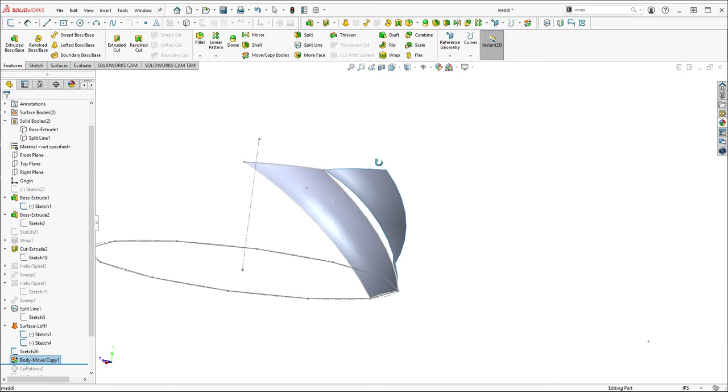I guess a cleaner way would be to use the move body command and select this body, and under rotate about this here, do whatever 360 divided by 12 is. Maybe this is a bit cleaner, less clunky than doing that pattern. But basically I just want to illustrate that there's this gap here.

So what we're going to do is create a brand new loft to account for this gap. Here we're going to click on the loft command. I'm still trying to select these sketches, that seems to be working. Now for guide curves, I'm going to select this existing edge of the current loft, but for this back edge, I'm going to select this one.

Now hopefully this will account for the gap, so we're going to check that box. These initial lofts kind of become like sketches that we don't need anymore. Now when we pattern this, I'm going to change the source body from the original to this new one. And now here we go, the gap is gone.

So now I'm going to suppress this out. This is for these kind of back arcs.

So now I created a new master sketch. Again, observing this here, it looks to me like there's this sort of daisy chain of arcs down the middle, and that's what this is here. Now here's what I have: I have 1, 2, 3 faces to loft from this to this arc.

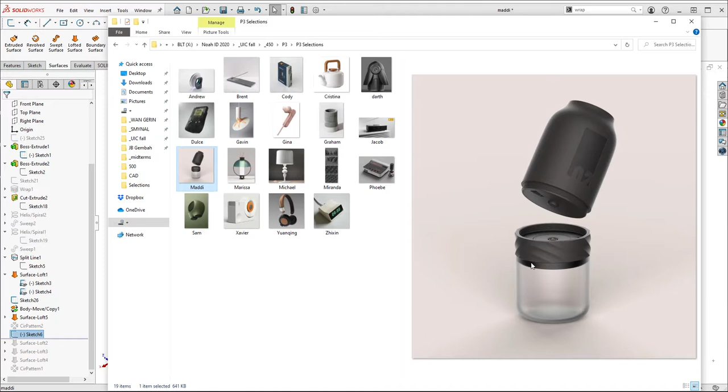But of course we have to create new arcs here. Again, it looks to me like there's an arc from here to this middle line, arc from here to here, here to here. This is just kind of trying to point you in the right direction. There may be some ironing out that needs to be done.

So again, here you can see I have this arc here going to this one, new arc here going to this one. If I edit this command...

Both of these, it's worth noting, have a normal to profile setting. So this center sketch—you can see this line here, hopefully you can see this arrow—is giving it a trajectory of being tangent to itself so that when it's mirrored, there's no seam in the middle. Now this one is aligning along this bottom edge here. So those two are pretty straightforward.

This last one's a little bit more complex, so I'm going to recreate it again from scratch. This is on the front plane. I'm going to create a new sketch here and convert entities on this one.

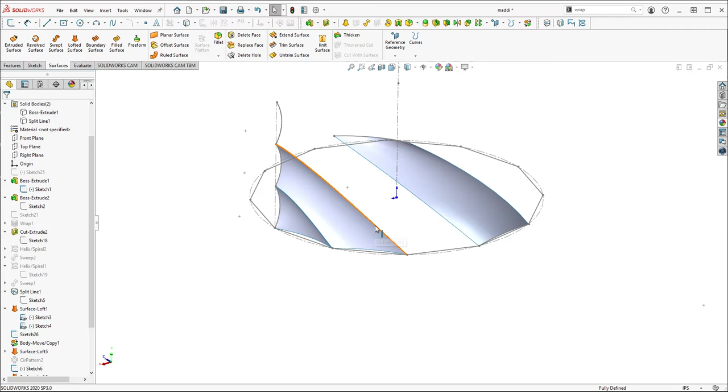And now I'm going to create a new top plane sketch and make an arc here. I would also recommend keeping all these arcs consistent, so that would be like dimensioning this value all to the same amount, just as a suggestion.

But now we want to loft this to here, and of course the challenge is we also have to blend it to these two edges, and this edge disappears. So here's a new kind of trick.

Under sketches, there is an option called 3D sketches. They can be a total pain in the ass, but this is how I like to use them. I would take a spline and click on—I'm going to hit Alt-V to hide all the sketches, click on this endpoint here, Alt-V to turn the sketches back on, and this one—oops, I meant to select this one here.

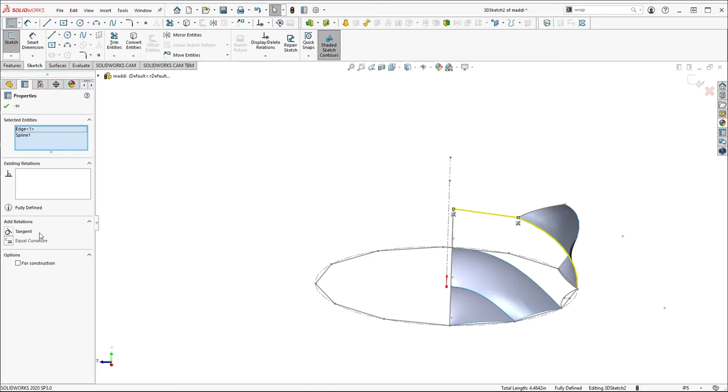Select these 2 points and make them coincident. Now what I want to do is select this edge and this spline and tell it to be tangent. So now we have a nice curve, and I would not mess with this blue arrow—it will give us the most gentle curve. It's a simple way to extend this edge to the point where we want it to go.

Now the confusing thing too, if you click on sketch, it's not going to exit. I guess you could click on this here, or you can click on here in 3D sketch. Now we're going to create a new loft.

So again, under surfaces, go to the lofted surface, select here and select here. Whoops, wrong one, my mistake. We want to select our copied sketch and this here.

And now for guide curves, we want to select this, and then this one here—we need to right click on it and say Selection Manager and select both of these since they're disjointed. Eventually this can be trimmed. And again, I forgot one critical point, which is to make sure that this is normal to profile.

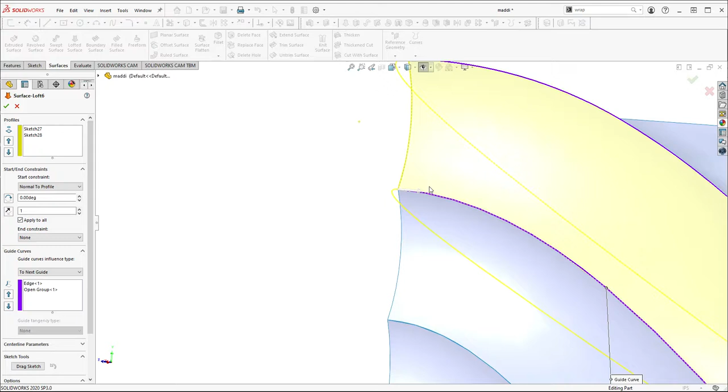Is that right? Is that the right one? I don't know why it's looping back like this now.

Yeah, I don't know. The arrow pointing to the left seems to be working better in this instance, which is weird to me. But hopefully when that's mirrored, there's no seam. So a combination of...

Right, obviously we don't need all of these. I think you can always hide them or delete them. Let's see, we don't need this one either.

So of course the challenge here is now, how do you terminate this? I'm going to try this. This is the simplest thing I can think of to complete this. So knit surface combines surfaces. We can select all of these faces and go about halfway around.

So here's our surface knit. I'm just going to select all these and hit delete. And that puts in a delete command here. You can always suppress it and it brings them back. Now we're going to bring this back.

So maybe it's better to do the threading after this surfacing, but what I'm going to try and do is actually cut this revolve in half.

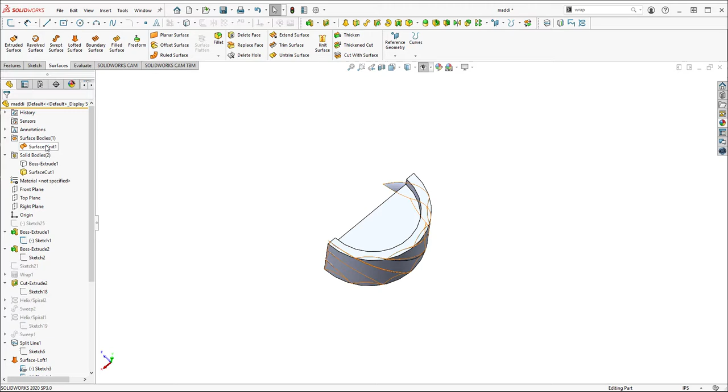And now with this solid surface, it looks like I deleted one too many. But here, let's try doing a thicken cut. This probably won't work.

Oh, okay, maybe it will. We just want to make sure that this is not prescribed. This is kind of a messy hack, so to speak. This is not the best use for this tool. But again, in terms of a simple introduction to surfaces - yeah, it doesn't like it. It didn't want to do that.

All right, let's try something else. So back here in the knit, I'm going to make sure that I get more than half. I'm going to edit this knit, and make sure that I also grab this one, and maybe this one for good measure.

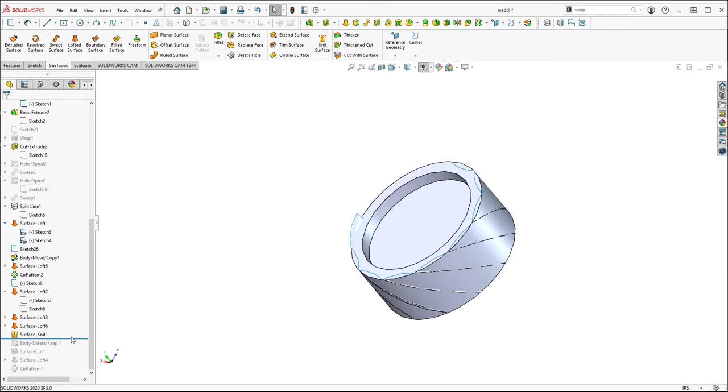And now here, this broke on us. And now bring this back. Okay, so now it looks like our surface goes all the way through everything.

Not sure this is going to work, but let's try it this time with, instead of thicken cut, we're just going to cut with surface and select this. And now it's pointing out like this. And we only want to cut this one.

All right, yeah, it didn't like that either. All right.

So what we're going to do, we'll try this one. We're going to take this front plane and we're going to trim surface, and we're going to remove this selection here. And now what we're going to do is we're going to take this front plane again, and we're going to use the mirror command.

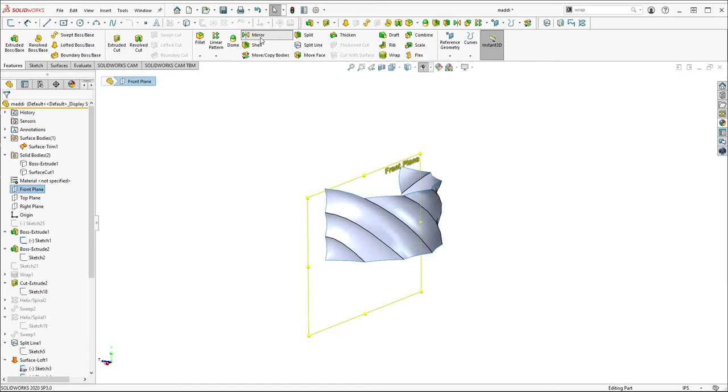Yeah, this should work. And then we're going to - I'm realizing that this needs to be trimmed here, so I'm just going to create a sketch on this front plane.

Draw a line here, surfaces, trim surface. It's loading the sketch we were in. Selection is to remove, and we just want to remove this top crown. Oops, we want to remove it on both the surfaces, so that means I have to select over here too.

And now what we can do is we can knit these two together. So load the knit surface command. And now, let's see, the most surefire way I can think to finish this - it's a bit more complicated, but we have to use the filled surface command, and it's a bit tedious, but it's a matter of going around here and selecting all of these edges.

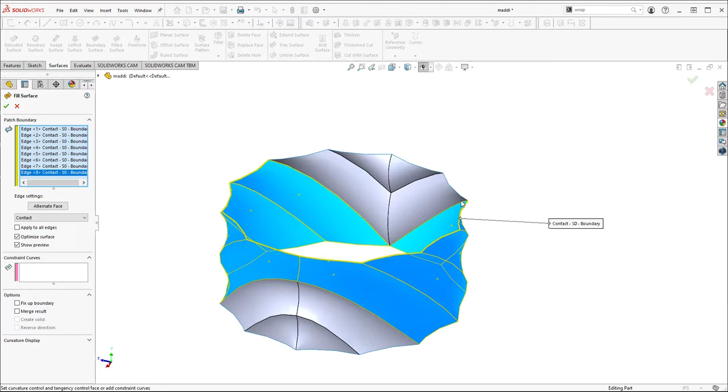Now the back is a bit wonky, but we don't see it, so we can get away with that. You have to do the same on the bottom.

Whoops, not this one, but this one. Yeah, you want to make sure you select all the edges. And now we have, if it knitted together, a closed body, so now we want to select on knit and say create solid.

It's a little bit more clunky, but that really is probably also just the most robust way to do that. The other ways, I was trying to just get away with something quick. So the order in which I'd build this, I'd probably start with the surfacing actually before putting in all that threading and stuff. But yeah, there you have it.